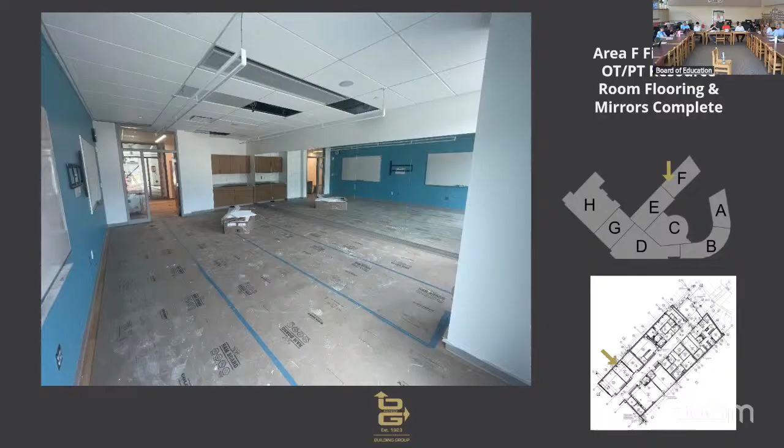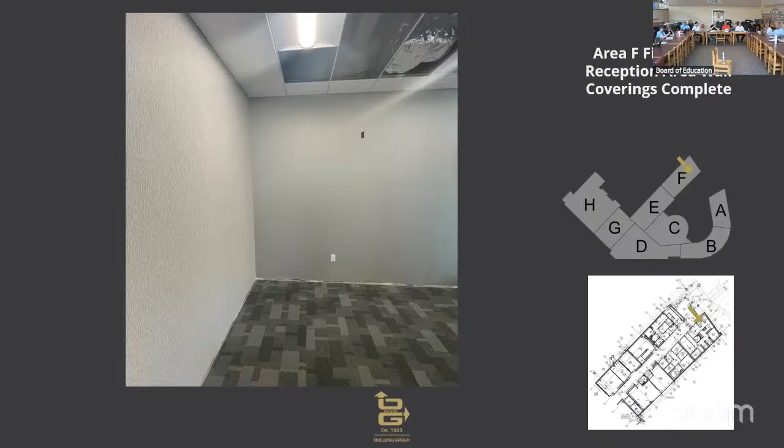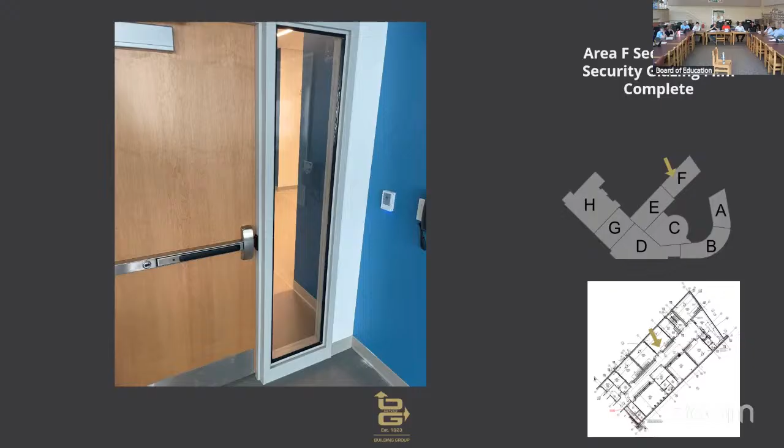Moving upstairs to area F, it's a little difficult to tell from the picture, but it shows progress of the security glazing film installed on the glass of the hollow metal frames. This work is now complete and has kicked off the next activity, which is installing the panel signage.

Next up, status of rubber flooring in stair 5, in building area F, and stair 4 is also complete, in area E. Rubber flooring is now completed; all that remains in these stairwells is some touch-ups and final cleaning.

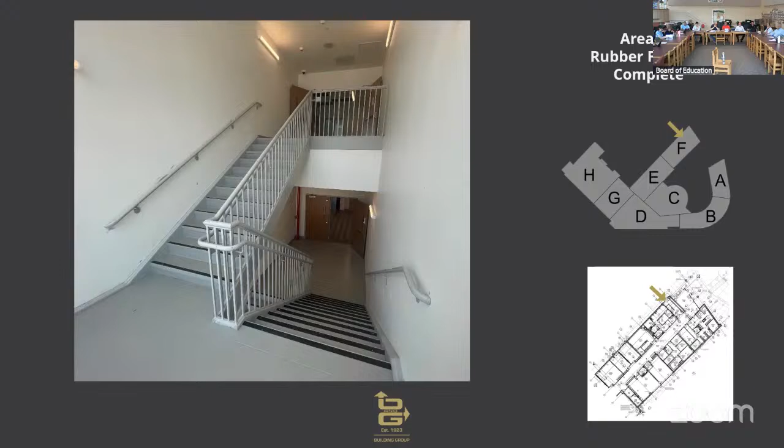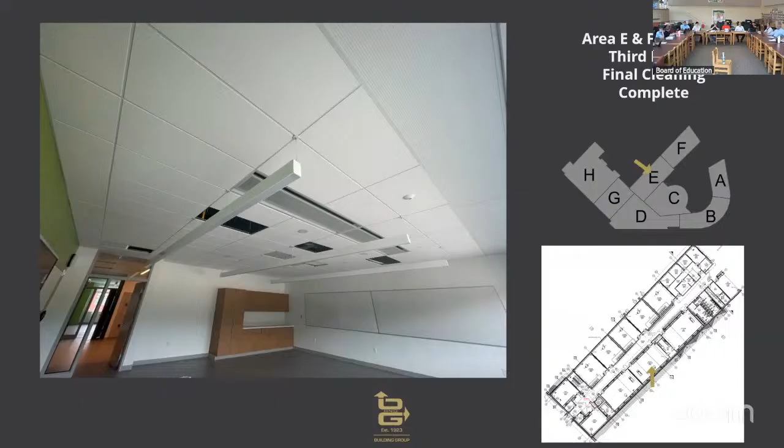As mentioned during last month's update, the second and third floors of the middle school have been final cleaned. As a reminder, the sequence in the middle school has us walking out the front door, and final cleaning in that area is nearing completion. It will time out perfectly for the bulk of FF&E arriving within the next upcoming weeks.

Another item discussed frequently at these meetings is that we are continuing to balance the air and water systems related to the HVAC systems. Once these activities are completed, it will allow us to do the final installation activities and close the ceilings for good.

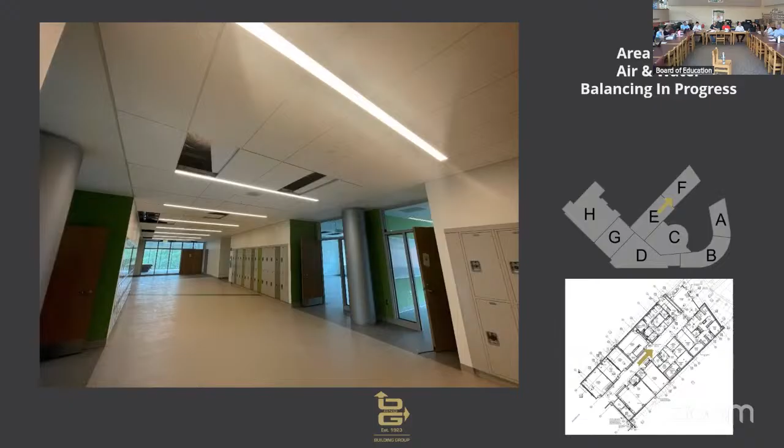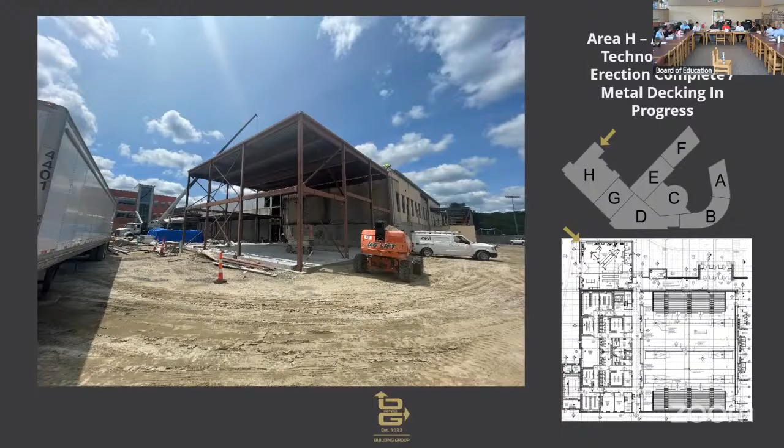Now for the fun part, area H is well underway. Steel erection detailing has been completed for the added structural steel in the auto shop. The metal decking is in progress. This area, as of today, is beginning to receive intumescent fireproofing, which is nearing completion and is required ahead of the masonry walls being constructed, which will ultimately kick off the final roofing activities for this building.

Next slide, same idea. This is in the addition area, the gym lobby continuation, the concession bump-out area, leading to the auto shop. Structural steel detailing has been completed, along with the metal decking installations at the time of this photo.

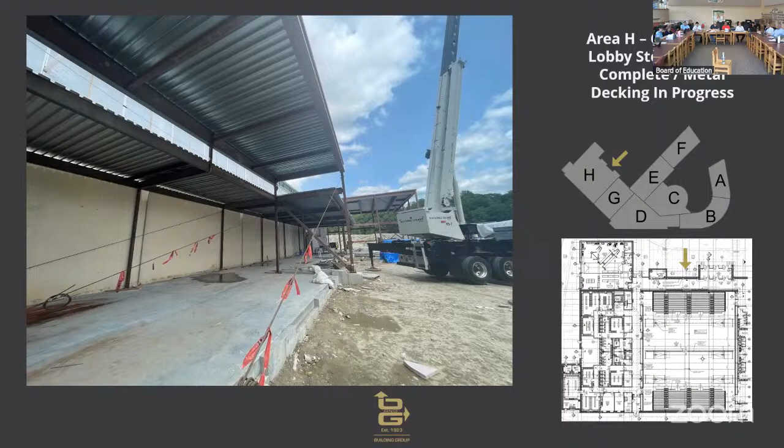So next up here, we're looking at the east elevation of Area H. As you can see, the demolition contractors made some significant progress in creating openings in the existing CMU to facilitate the installation of new windows, man doors, and overhead doors.

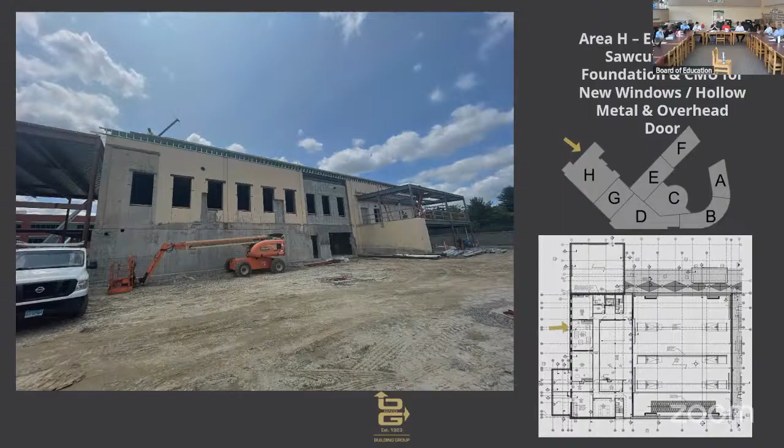Moving around that same corner to the north elevation, on the Route 8 side of the building, you can tell the Mason's hydrolift is set up. The miscellaneous metals contractor has installed all the necessary angles needed to support the future curtain wall or window systems, along with the carpenter installing wood blocking for those systems to be secured into.

We are continuing with some of the spray foam activities required at the parapets, cold form metal framing parapets based on the details. All this work needs to happen to install the air vapor barrier system before the masonry contractor builds the veneer wall, which fast forward to today, they're up on the hydrolift installing veneer.

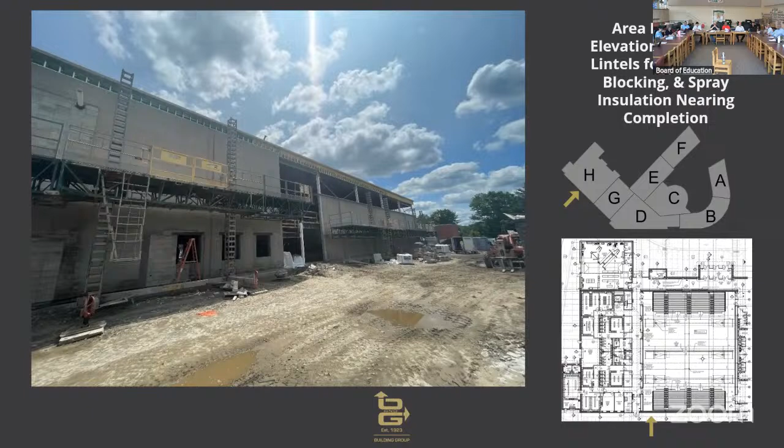On the inside of Area H, we are looking at the west wall of the gymnasium. The white stuff on those columns is intumescent fireproofing, which since this picture was taken has been completed. Additionally, the miscellaneous metals contractor has installed the X bracing you see there, required based on the structural details.

As you can see, we have begun to construct the cold form metal framing wall and exterior sheeting at this elevation to close the area off to the environment and continue installing the permanent systems.

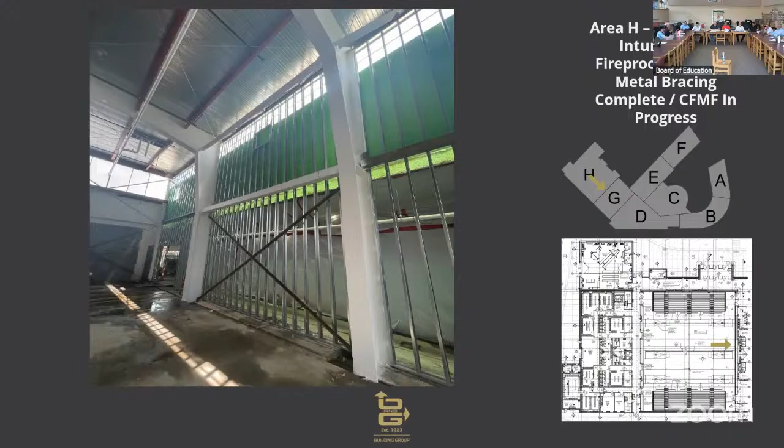Moving east on the first floor into the locker room, if you recall, we had to cut the existing slab to facilitate the installation of new underground piping. This slab has been replaced since the last progress update, and masonry walls are being constructed as we speak. They are actually near completion as of today.

How old is that photo, you think? It's very cold, maybe two weeks? Not even, probably a couple weeks. The majority of those walls are already up, so.

Forgot to mention that once the slab was replaced, it allowed our mechanical, electrical, plumbing, and fire protection contractors to install hangers to support their overhead piping and ductwork, which will be installed once the mason finishes up here in a few days.

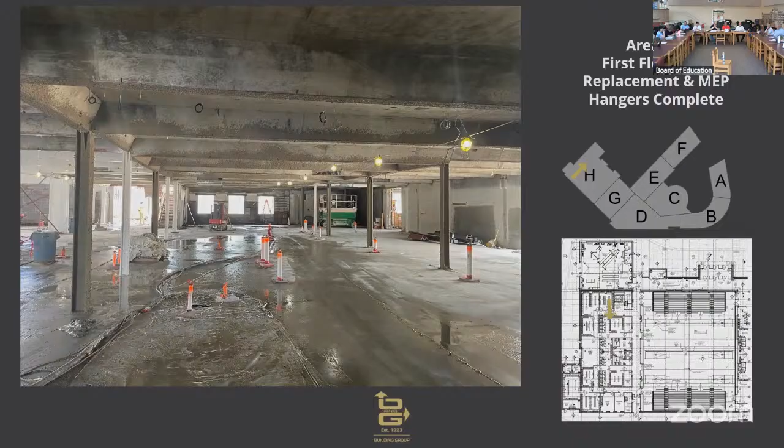Moving upstairs to the second floor, the mason has completed the elevator shaft for elevator number 4, the final elevator in this building. There was no elevator in this exact location in the existing building, so there was actually a beam running through the future shaft. What we had to do is have the mason install walls on the first floor on the underside of those beams so he could shore that beam, and then the demolition contractor went and cut the section of beam out to create the elevator shaft.

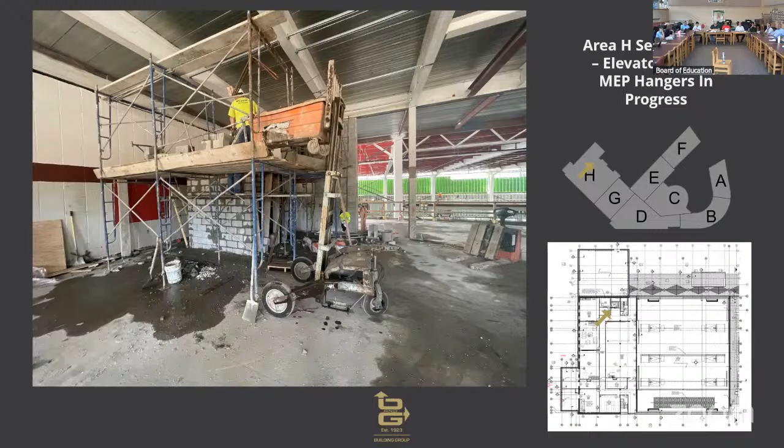Up top on the roof of the renovation area, here is some progress showing the extents of the parapets, which have been framed and sheathed, with wood blocking installed. As of today, the base and tapered insulation, the cover board, and the membrane have all been placed, and we are in a dry condition beneath the gymnasium and locker room areas underneath the renovation, which is another huge milestone that's been completed.

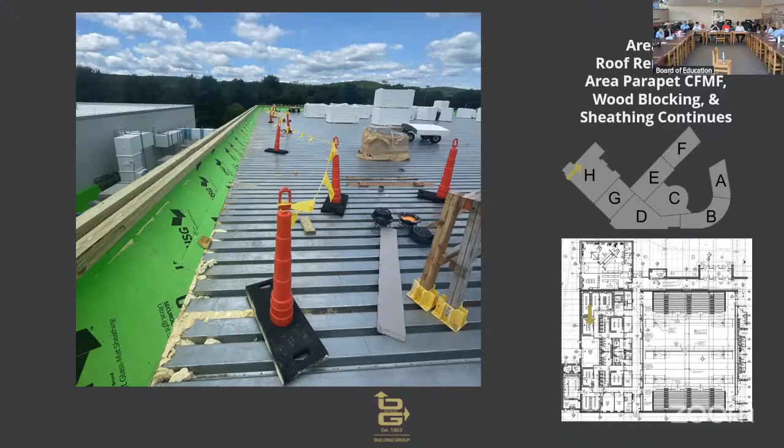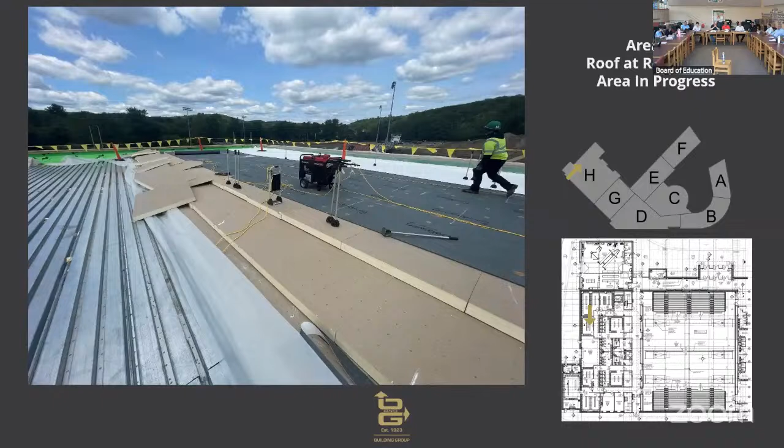Next slide here, just reiterating what I said. Off of the metal decking there, you've got that plastic looking vapor barrier, we call it. The base and the tapered insulation where it's required, cover board insulation on, and TPO membrane making up the roofing system. This photo was taken a few weeks ago, but the roof is on and dried in over there.

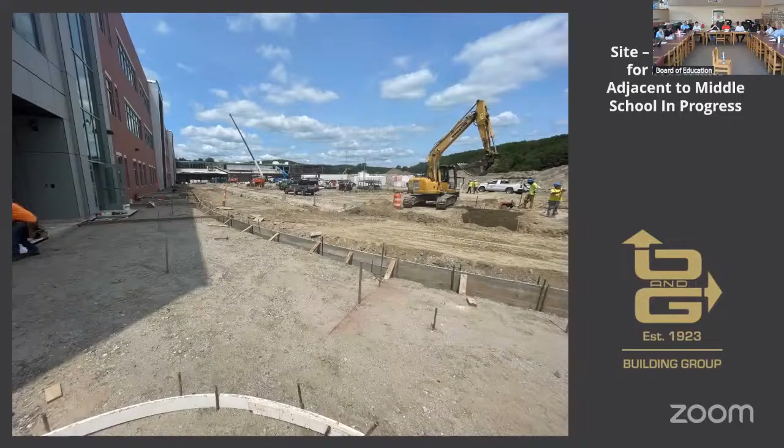Moving outside, we are preparing for some more concrete sidewalks that will eventually make up the pedestrian walkways in the future middle school parking area. We have actually begun to place the curbing areas of this lot, along with all the ADA walks, and over the next few days and weeks we're going to continue pouring all the flat work.

Staying within the middle school area, this parking lot is beginning to shape up. We are trenching and backfilling for electrical conduits for the site light poles. We're preparing for the installation of the precast concrete curbing and the rain gardens. All these activities are needed ahead of the fine grading activity, which needs to occur before our asphalt paving date in early August. It's going to be here before we know it.

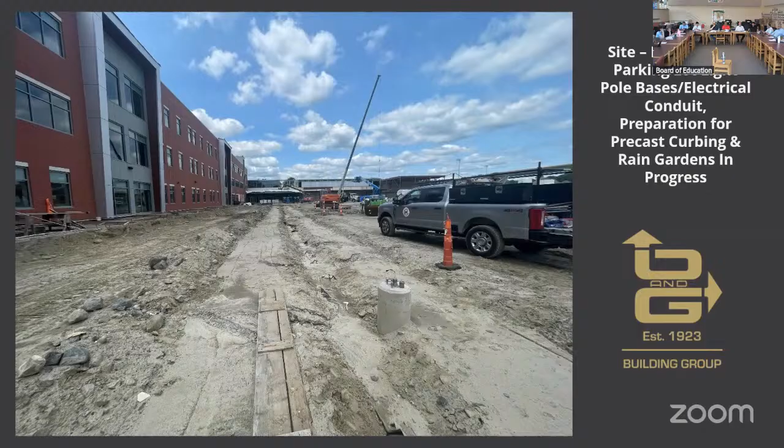In the last week, we placed some fencing sleeves that have been set ahead of the concrete anchoring curb, which is being placed on the baseball side of the multi-purpose field. I think they've already gotten the first and third base lines placed as of today. It's done. We're working tonight, work is proceeding.

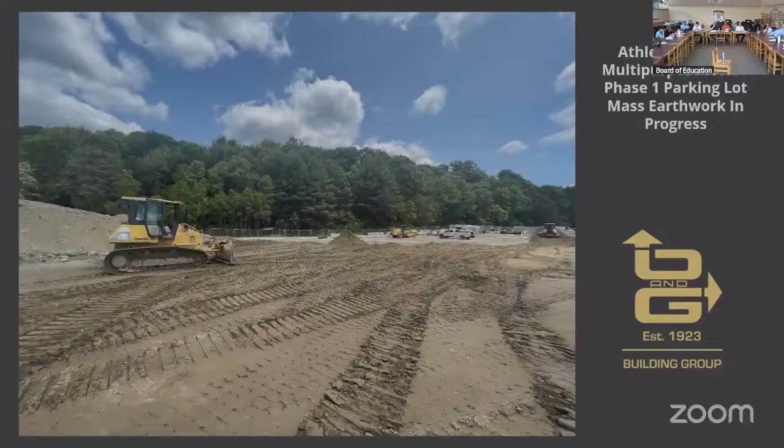Next slide here was taken in the soccer field portion of the multi-purpose field. Mass earthwork operations at the time of this photo are continuing so we can move forward with successor activities, but it's all been graded out at this point.

Just to quickly report on some cost and schedule impacts in the period. I'll start with what I have and then Dan can report on the status of the athletic field pricing.

In the renovation area, it was discovered that the height of the existing CMU exterior walls along the north, south, and west elevations were not at the heights we had assumed based on the drawings. We sent in a request for information and proposed a solution to add 6-inch studs with kickers back to the roof deck to make up the difference to where the CMU was supposed to be. We reviewed it with SLAM, they said the solution was acceptable, and we had to proceed with the work to not delay the roofing activities and drying in the space so we could continue working. Order of magnitude of this change is roughly around $35,000 as we indicated in the cost report.

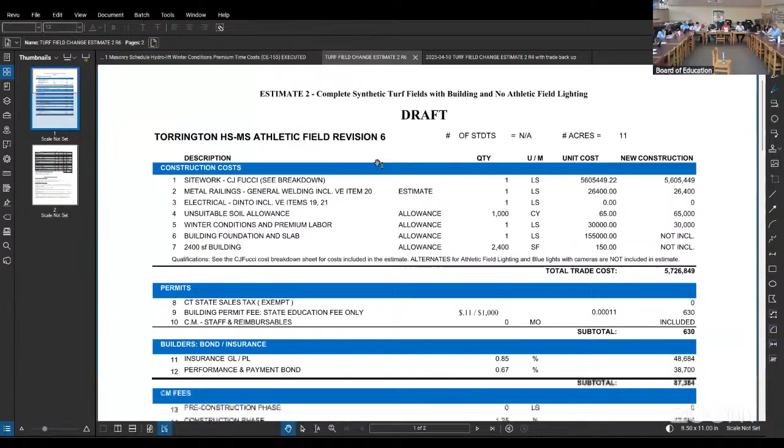As you look at that document, the front page is a summary of all of the costs associated. Very little change from what I reported last month. We haven't moved the bar too far from where I presented it back in April. It's still just under a $6 million mark as far as added cost, and the return cost of $1.3 million is still relatively the same.

On the backside of that document is the cost specific to CJ Fucci. I'll draw your attention to the line item breakdown of what CJ Fucci's costs are. I've highlighted, it's pretty hard to see, but there's a shaded darker gray for when they're already PCOs and executed. As a reminder, the top of that chart reflects the self-perform work.

There's a couple of things grayed out, but actually only the loadout has been resolved. I'm meeting with CJ Fucci tomorrow with the new set of documents, the R1 set. CJ Fucci's prime, the project manager I've been working with since starting the project, is also their senior estimator as well as senior PM. He's been pulled thin, so I've been having some trouble getting his focus back to our project and getting these things worked through.

Their resolution is that they have another project manager moving into his role to bring this cost to resolution. But in doing so, the savings we had anticipated from not having to deal with any unsuitable material - all of the earth product in place has passed inspection by the geotechnical engineer - unfortunately we've seen 2 additional costs that I noted as new. That's taken exactly the same savings we had hoped to gather. But again, those are just the numbers he's putting out there, and our negotiation isn't reflected here yet.